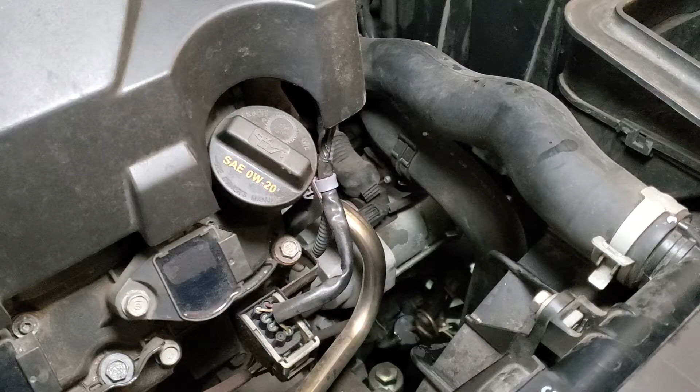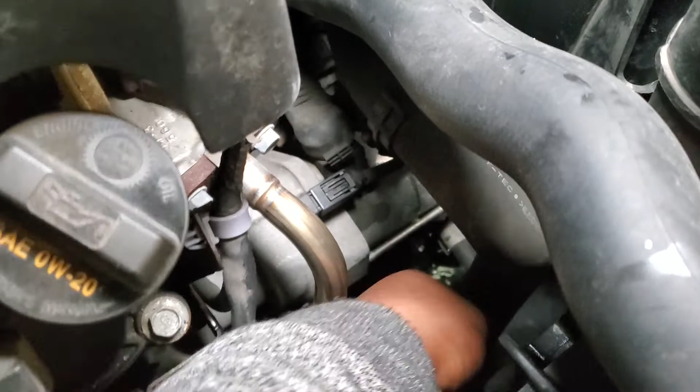Today we're going to be doing a transmission fluid change. So if you see that little black thing right there, we're going to pull that out. This is for your transmission fluid. This right here is how you check your transmission fluid to see if it's dirty or not. It's going to go back right in that little hole right there. I hope you guys can see that. If not, I'm gonna just put this right back on and we go from there. I'll leave it open for now.

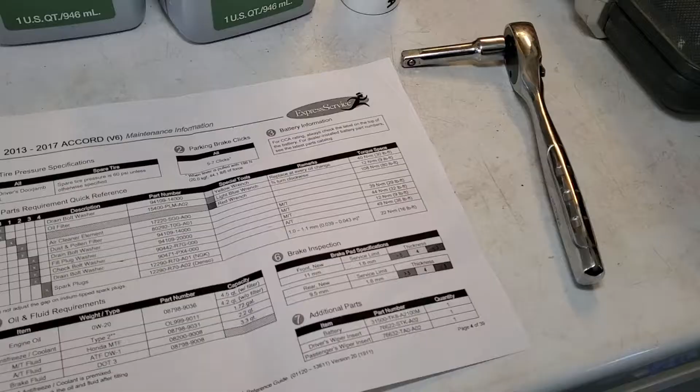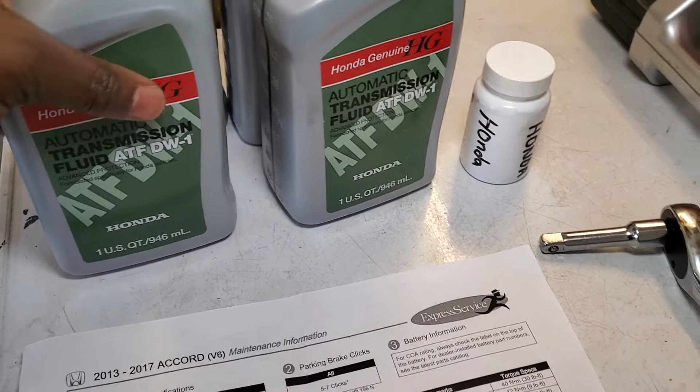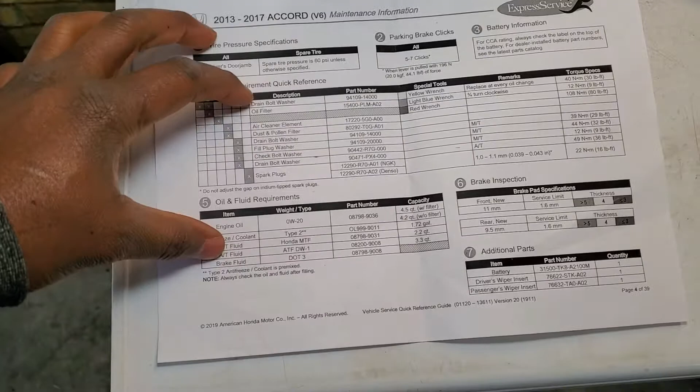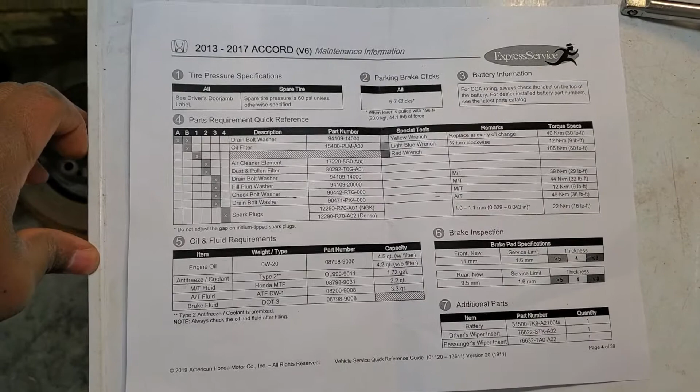All right, guys, for today's fluid change, we're gonna need the ATF DW1. It's for Honda, I got this from the Honda dealer shop, but I did my first fluid change. I got that from Amazon also, and as you see over here, it's an empty container. I done my first fluid change before because my vehicle already has 100,000 miles, and I use it for so many different stuff, so the mileage went pretty fast. I also got the sheet for some of y'all who might want to consider doing your car service on your own. I got this from the Honda dealership, so these are all the requirements. If you guys like, you can screenshot there and keep it on you. That will definitely help you.

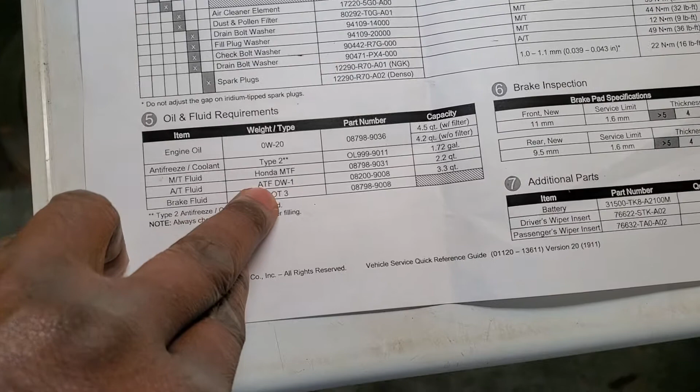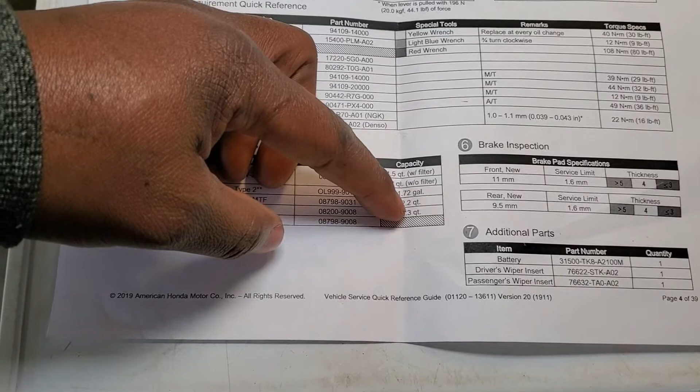So the transmission fluid over here, you see the ATF DW1. Let's say we're gonna need 3.3 quarts, okay? But honestly speaking, this is gonna be my second time doing my fluid change, so I use all 4 quarts. It doesn't hurt if you put 4 quarts in it. These are just the minimum capacity they give you, not the maximum, so you can go more than that, but you cannot go less than that, okay? So it's totally up to you. This is the reason why I printed that sheet, if you want to use the 3.3. In my case, I'm going to be using all 4 quarts, okay?

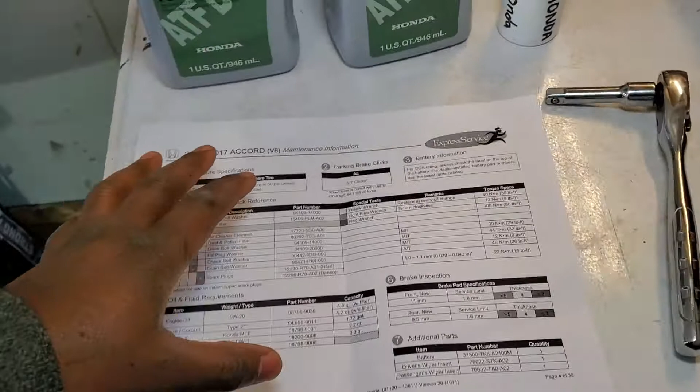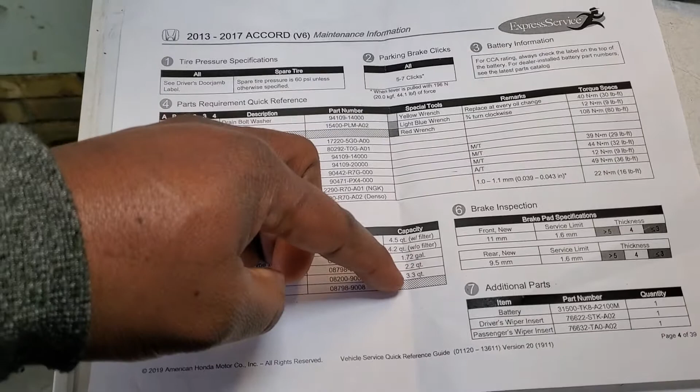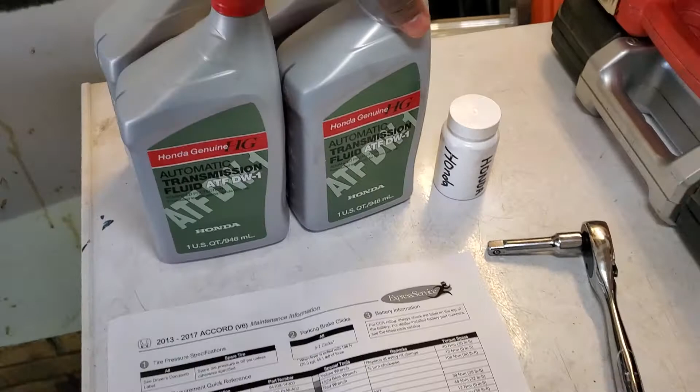Because some people even get to add a different type of liquid after they filled up the fluid, like a different type of product, in order to protect the transmission fluid or something. That will also increase the amount of fluid you have in the transmission. So if you put 3.3 quarts of transmission fluid and then add a different product to protect that, it's also going to increase that, so you're no longer going to have 3.3, you're going to have more. But in my case, I'm not adding any product. All I'm going to be doing is just the 4 quarts, adding all 4, 1, 2, 3, 4.

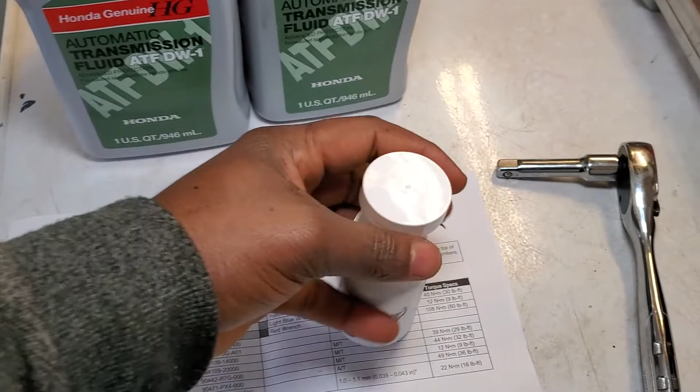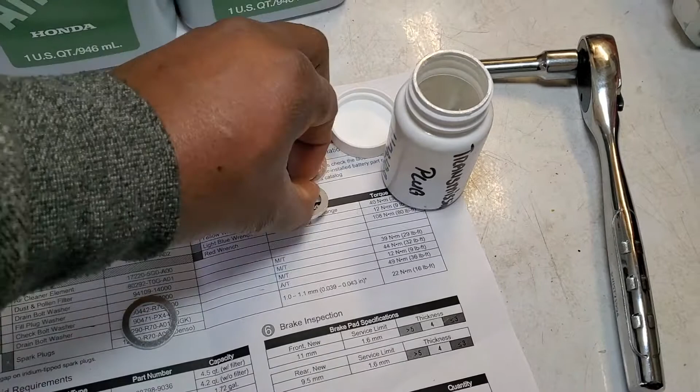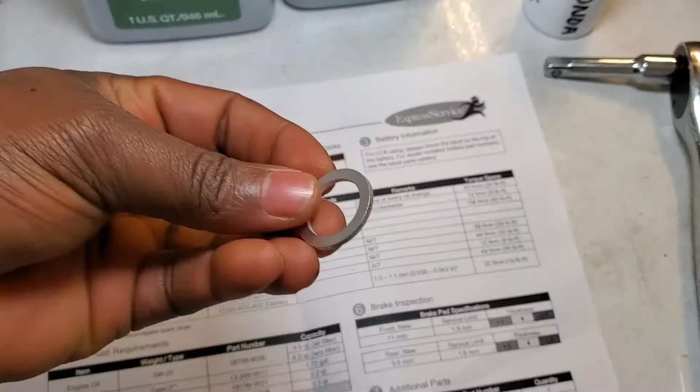Over here I have a dozen transmission drain plug O-rings for the drain plug, so we're gonna need one of these, okay? We're just gonna use just one. Put all these back into the container, and that's it. If you go get this from the dealer, you can also ask them for the O-ring, they're gonna give you one for free. Or if you want, I could post a link in the description where you can get a dozen of this and keep it on you for maybe $5. So that's what we're gonna need.

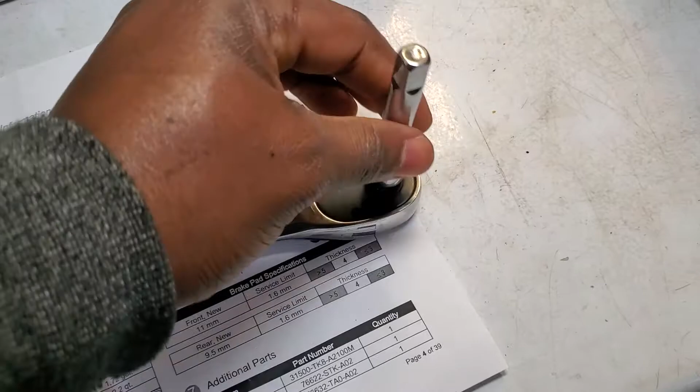We're gonna need a 3/8. Over here I have my 3/8 ratchet, and I have my extension, because you're definitely gonna need an extension in order to take it out, just like that. Just a 3/8, and that's all we're gonna need.

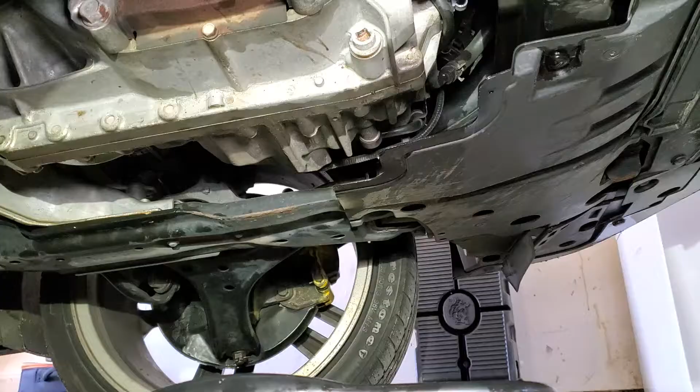Okay guys, if you see over there, that's the transmission drain. You want to have a little container like this in order to drain your transmission fluid out of it. I'm gonna put the camera right here, and I hope you guys see what I'm gonna be doing.

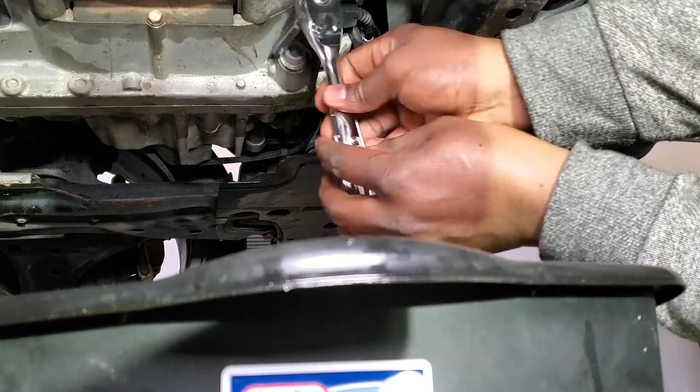If you're not seeing anything, just yell at me, say 'Hey man, I can't see anything.' So we're gonna put this here. A lot of people use a torque wrench, I don't really use one. Just make sure when you tighten these things, you tighten them in a way that you're gonna be able to take it out.

So while we have that like that, I'm gonna pull this out and do it by hand. I got my container ready, and that fluid is gonna come right in there. As you see, the fluid looks pretty dirty. One thing I need to let you guys know, the fluid drains out pretty slow.

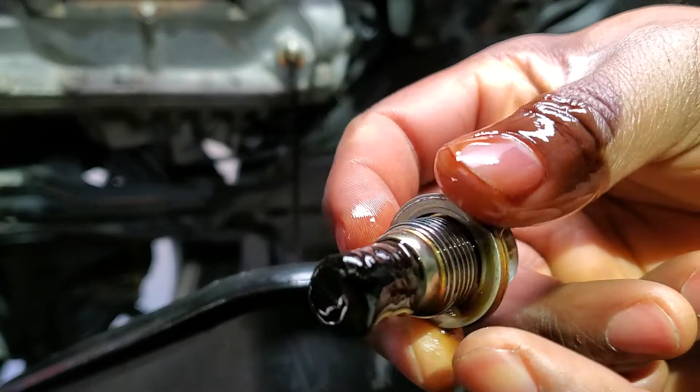If you see over here how black that thing looks, it's a magnet. You might want to clean it and make sure you take all the dirt out. Sometimes it's a piece of metal or something that gets stuck to that, so make sure you clean it out.

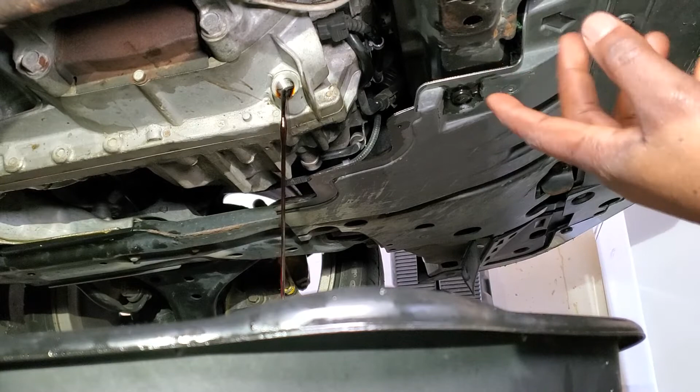Okay guys, as you see, the fluid is draining out pretty slow. What I would recommend for you guys to do is put your jack underneath your vehicle, raise it up, remove the jack stand, and allow the vehicle to sit flat on all four wheels. That will also help the fluid drain out pretty quick, just in case there's any fluid somewhere, because in this position the vehicle might not be too flat.

But if that's not the case, you could just let it roll like that, it's going to take a while in order for that to drain out. In my case, I'm definitely going to remove my jack stand and get the vehicle on the ground so the fluid can drain out pretty quick.

By doing so, guys, you want to make sure a container like this is not too high, so your vehicle is not going to sit on top of that container. You want to have a container that's pretty flat, so when you get the vehicle down, it's not going to sit on it. So that's what I'm going to do, and I'm going to skip that section, guys.

Okay guys, we're going to go ahead and clean the transmission drain plug. Make sure you clean it pretty good. Like I said, this is a piece of magnet. If you don't mind, I'm gonna see if this is not metal, so let's see if we could get a piece of metal somewhere here. As you see here, this is magnet.

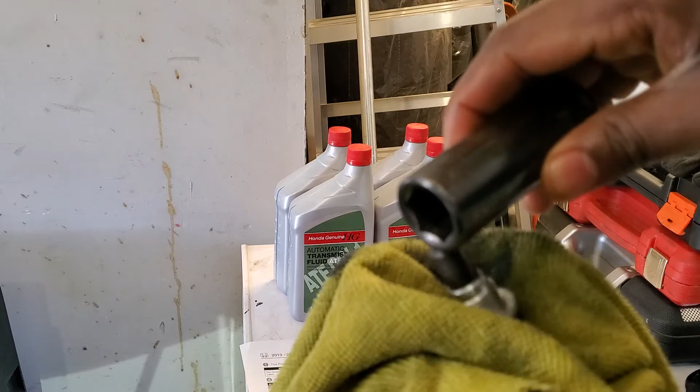It's a magnet that holds every little piece of metal coming from the transmission or whatever. As you see here, how black that looks - that's something you might not normally see. The cloth is kind of sticking there, right? You see it pulled in just a little. It means it's not just transmission fluid, it's a piece of metal that gets stuck to there.

That's the reason why you need to change the transmission fluid once in a while, so you can clean the drain plug.

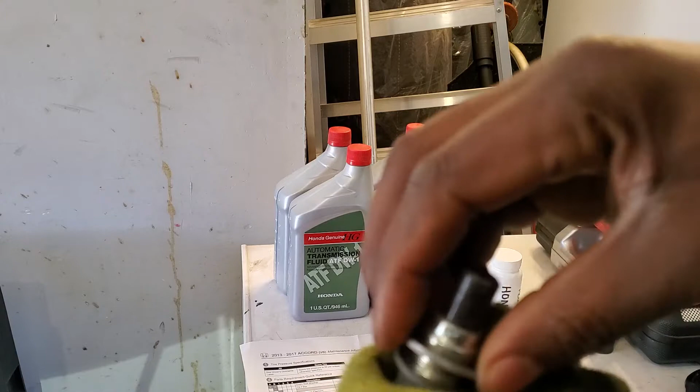Once we clean that drain plug, guys, we're gonna remove the old O-ring, we're gonna throw this one away. We're gonna grab a new O-ring, wipe it down one more time, and put the new O-ring on. The old one's gonna go away, we're gonna throw it away.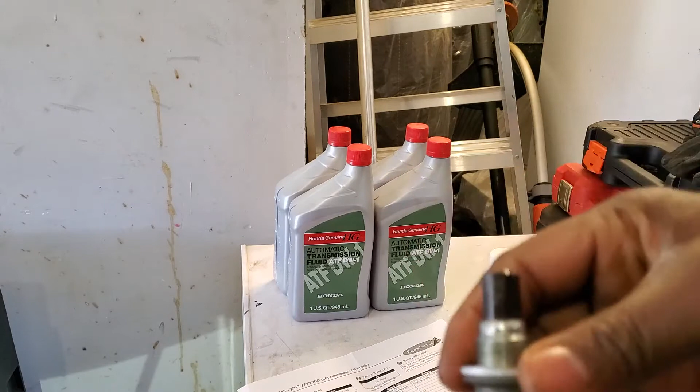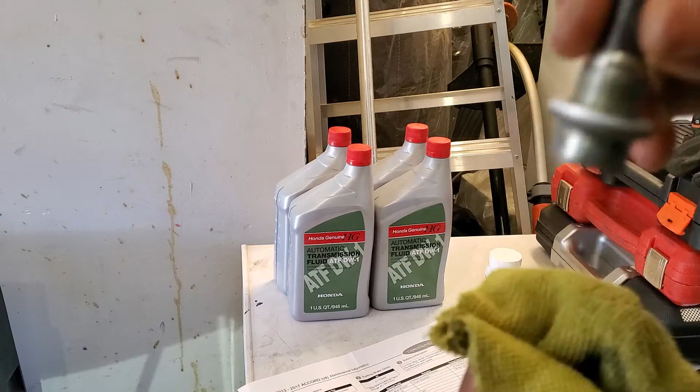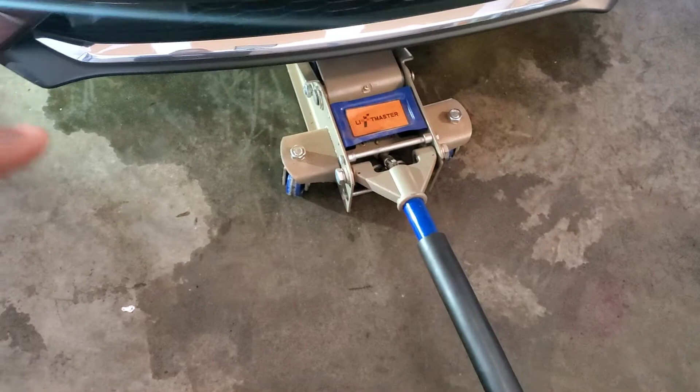Okay guys, this is what I did. Like I told you guys, I lowered the vehicle with my jack and removed the jack stand from both sides.

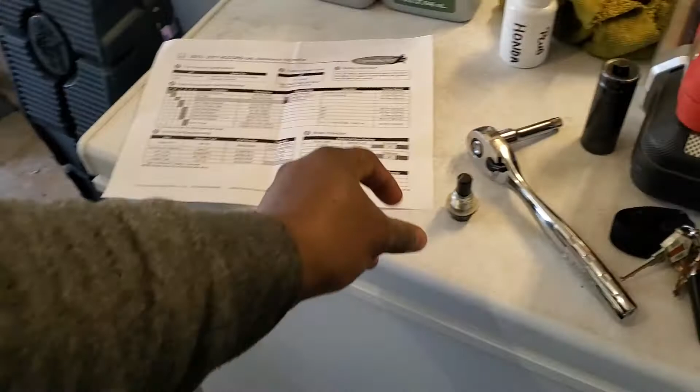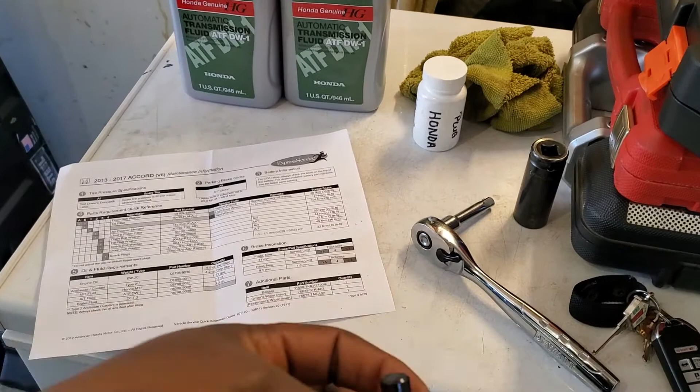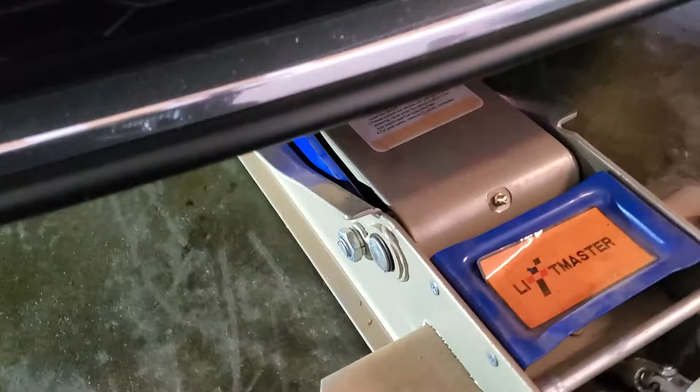Before you do that, grab your drain plug and hand tighten it just a little to stop the fluid from leaking. Then remove the drain pan and lower the vehicle, controlling it with your jack. Right now my vehicle is still resting on the jack, but I lowered it to a position where it's not going to come crashing onto my drain pan.

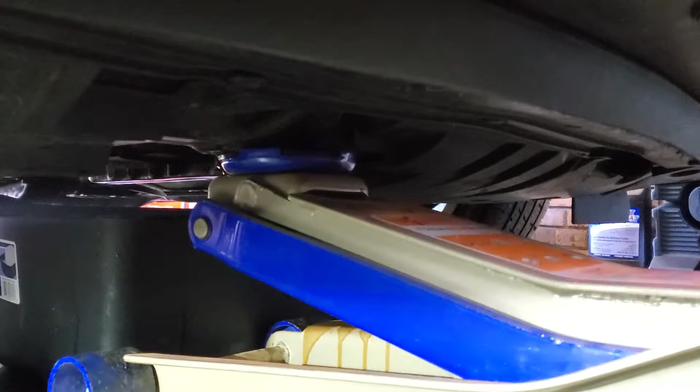Let me show you guys what I'm talking about. You see we're still having some liquid coming out. That fluid wasn't coming out when the car was on top of the jack stand. A huge amount was coming out earlier, but by the time I got to the camera, it already slowed down.

By doing it like that, it's definitely going to get rid of all the fluid from the transmission. Remember, when you take your car to the garage, they have a special lift that lifts the vehicle on an even level, so every liquid in the vehicle, including oil, comes down pretty fast. But in our case, we have to raise the front of the vehicle because we only have access to two jack stands. So doing it like this will make your vehicle come down a bit closer to the floor, so you're able to get rid of the entire fluid.

Right now, when it's done, I'm just going to raise it up, remove my drain pan, put back the drain plug, and refill it. So stick around guys.

You won't believe it, I still have fluid coming out. If this vehicle stayed on the jack stand, I wouldn't have gotten any of that fluid out — it would have stayed in the transmission. So this might be the hard way to do it, lowering the vehicle and removing the jack stand. You might think it's the hard way, but I think it's the smarter way to get rid of all the dirty fluid from your transmission.

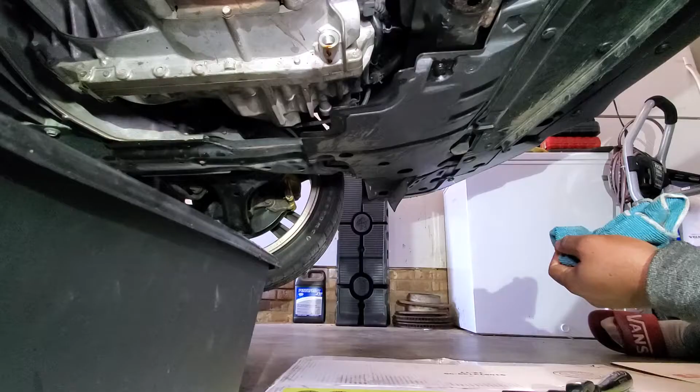Okay guys, I've finally been able to drain the entire fluid out, and I raised the vehicle back and put the jack stand underneath. You have to put your jack stand on in order to go underneath your car, so the car won't come falling on you, okay?

So I got a rag, I'm gonna wipe my drain, making sure nothing here is gonna stop the drain plug from sealing good. Remember guys, we put the new O-ring on. This, like I said, is a magnet. We already wiped it down, and now it's time to hand tighten it.

You want to check your owner's manual if you're the torque wrench type. I don't use a torque wrench, so I'm not gonna give you a specific torque number. For me, since I'm doing this whole thing myself, I just tighten it in a way that I won't get a leak. That should be good enough — it's not going anywhere. So like I said, it's totally up to you. Check your owner's manual if you want to use a torque wrench, okay guys?

So now we have everything over here, we're gonna go on top and refill it with the new fluid. We're gonna try to remove the dipstick for the transmission fluid and put that to the side.

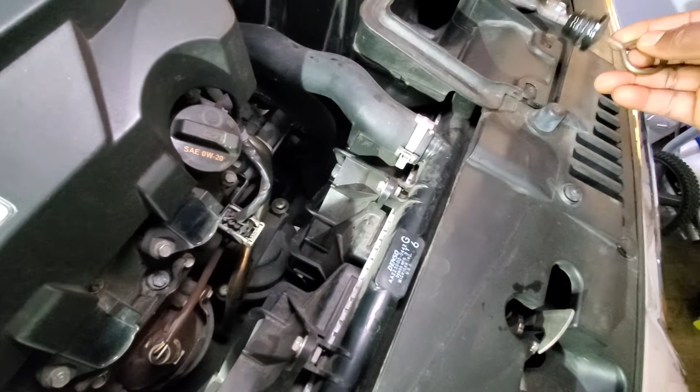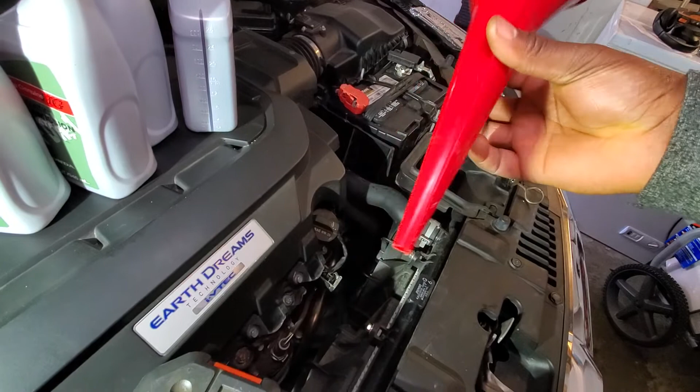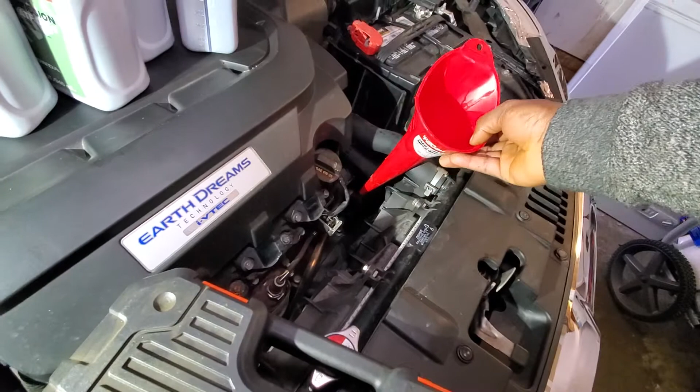These are the four containers. I already opened them for video purposes, so you're gonna need one of these. Unfortunately mine isn't too long — I've been lazy trying to find a long one for the transmission fluid to refill it. As you see it's pretty short, but I'm gonna manage to push it in there. If you're doing the same thing, make sure to find something a little longer. I only have this for my oil change, and since then I haven't had time to look for something for my transmission fluid. Let me put down the camera and adjust that.

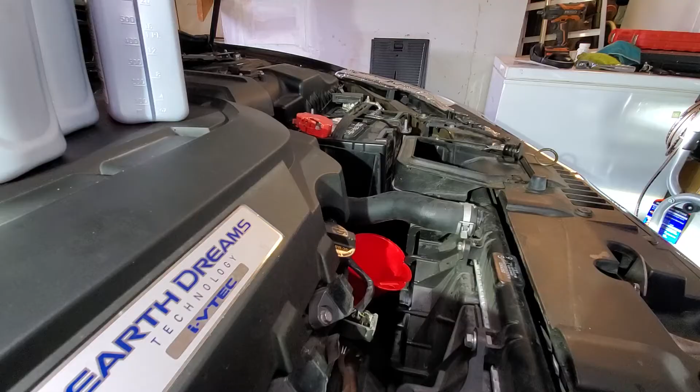Okay, here I am going to go super slow because you don't want to go too fast, and then it's going to overfill and get on the floor. So you also want to make sure that thing is plugging into the hole. Make sure that the flow is going in, not getting on the floor. Yeah, it's going in.

All right, so you see the new fluid, what it looks like, pink or whatever. That's the way it's supposed to be. So if you notice that your transmission fluid is like coffee, pretty dark, then it's kind of damaged and you might need to get a new one and replace that. And that's the reason why we're doing that today, because when the fluid is damaged, you kind of get some noise in your transmission while you're shifting gears.

So I'm gonna look here to see if nothing's coming down. All right, nothing's going down, so everything's going right in there. Like I said, you gotta go very slow.

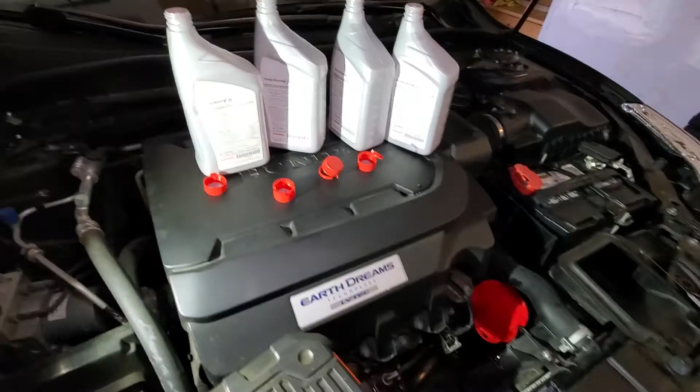Like I said, I don't do any fake videos, I'm not here to damage my vehicle. I'm here to give you guys the correct information. What I do that works for me, it's totally up to you. You can do it the way you want to do, but this is how you do that.

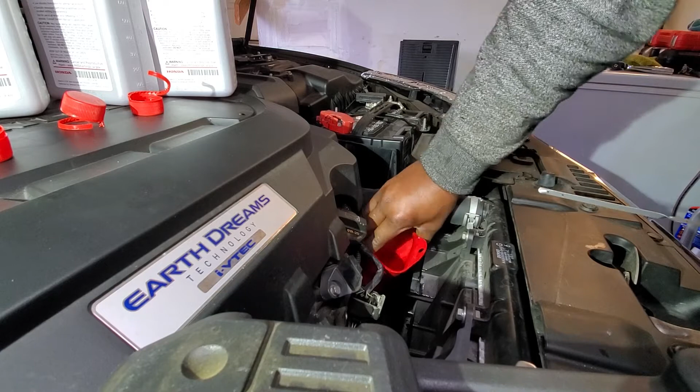So once we're done, we are definitely going to wipe this up and make it look clean. All right, got this wiped down. So I'm going to remove that connector, take it out. There we go, put that to the side and plug this right in there.

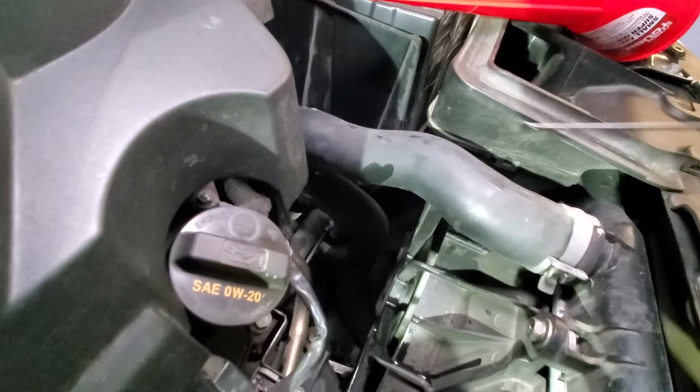As you see that little gap right there, it needs to be plugged in, there's something out there. It's kind of hard to show you guys because there are no lights out there. It needs to connect to that so it could hold that in place. All right guys, see, I have it connected. This is right there, if you guys could see that.

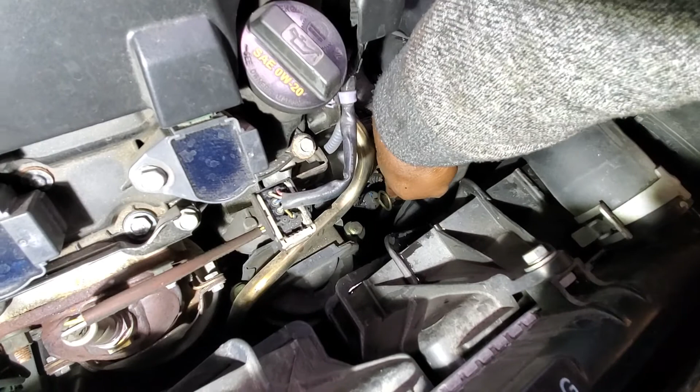So that's the way you do your transmission fluid change. In that case, you might just drive like you normally drive. The system's gonna immediately process the way it's supposed to process.

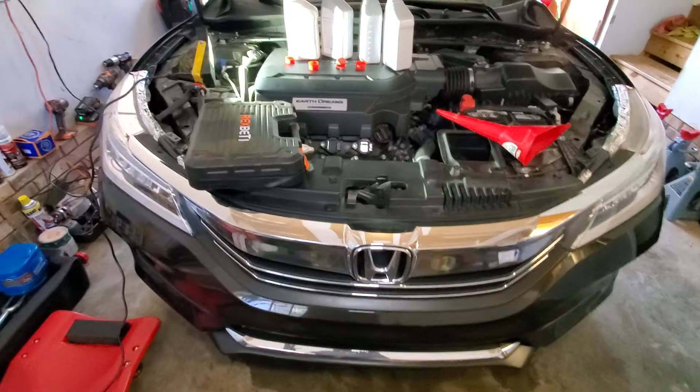That's the way you do your transmission fluid on the Honda Accord. This is a 2017 Honda Accord, so this video is pretty much good for all Honda Accords, let's say 2012, 13, 14, 15, 16, 17. Mine is a 3.5 V6.